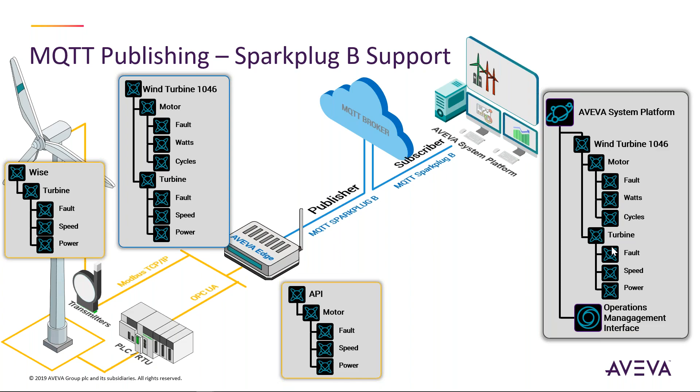Now I'm going to shift gears and start talking about InTouch HMI, which is another one of the components we described as being at that asset location. This was formerly under the Wonderware brand, and it is now completely part of the AVEVA family. When we look at InTouch, one of the most exciting things happening in the 2020 release is in the area of web capabilities.

We've had web capabilities through InTouch with technology called InTouch Access Anywhere for some time, but the key difference here is we no longer have a requirement for remote desktop services. We can now do these things with a very minimal footprint on a client operating system. So you could use a bare Windows 10 industrial PC, and you'll now be able to deliver these as native web capabilities.

It's not going to be an image that's remoted over. It's actually a full HTML5 native system rendering on the far side. That allows you to have a minimal footprint on your server because all of the clients are doing the rendering, so you don't have to do the rendering on the server where it's located. It allows for a very minimal footprint, and it's very exciting stuff.

We've been introducing InTouch web capabilities since our 2017 update 1 release, which was a few years ago. In this particular case, we're really now finishing off that broader story.

I'm going to show you this in a video where we've taken our demo application and reworked it a little bit from a branding perspective, running in a browser. It'll start off running in a Chrome browser, and then that browser will be set to full screen, and it'll look like basically any other InTouch application.

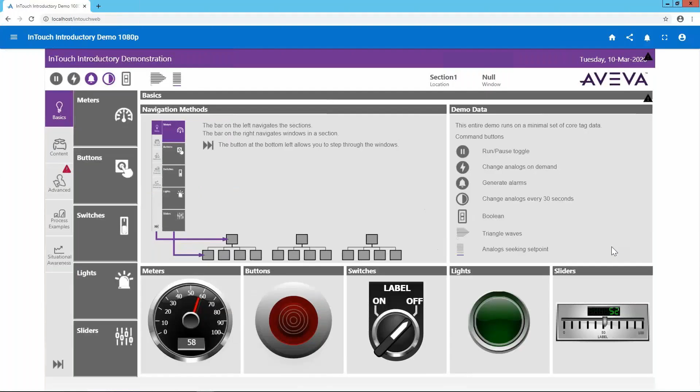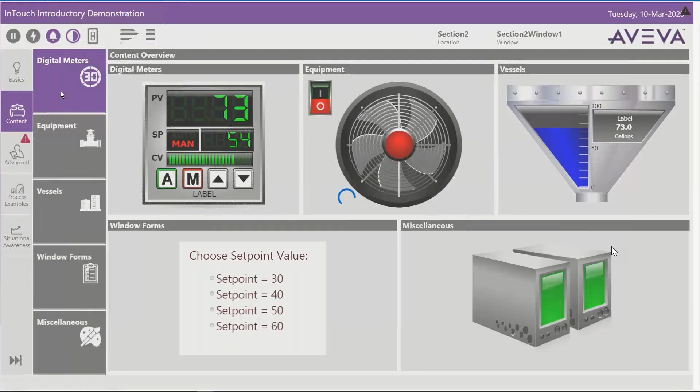Here you'll see I'm running in a Chrome browser. We've just set that browser to be full screen, and now I'm navigating. That's one of the new capabilities, being able to navigate between content. You're also seeing me clicking on some buttons, which allows me to do write back, based on full security, full permissions, and full HTTPS as part of this.

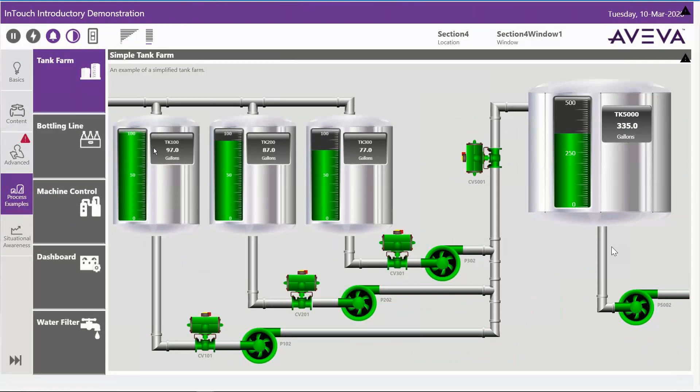We have full capability for things like alarms and alarm controls, being able to do acknowledgements based upon the permissions of the user logged into the system, and access any of your existing content or applications. You can bring those graphics into this system, and leverage even some of the late-breaking capabilities we've introduced with regards to situational awareness and dashboarding capabilities.

We're really excited to put this into the hands of more and more customers so they can start doing some different things. Beyond being able to do basic HMI type capabilities with this web capability, we recognize there are other types of scenarios we can unlock for our customers.

A pretty common use case we see is where our customers are utilizing very low cost TVs that they can put up around their plant, and these TVs often have a browser built into them. How can we use that here?

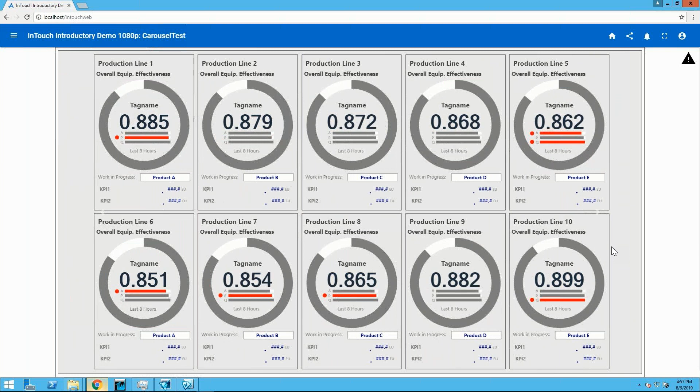Well, we can use that in terms of something we call a carousel. A carousel will take that web browser and push up just a few selected symbols, then carousel through them at a rate you define as part of the web browser widget. So if you have this on a TV, you don't have any dedicated hardware for the TV, and you don't have to have an industrial PC or some other device out there.

If the TV's got a browser built into it, you can just link it up to this particular URL, and it'll go ahead and carousel through so that you can provide that line-level signage onto your applications, all being facilitated from one common source, which is that core InTouch system.

Other use cases we see revolve around mobile. We're introducing two new mobile applications, one for iOS and one for Android, that allow remote InTouch access, so you don't have to figure out the URL or browser to type in your applications. I can store my credentials with this application, select from a list of applications, and bring them up directly to my mobile device. This will facilitate mobile users of all types to have access to their traditional process graphic data inside of InTouch. Very exciting experience you'll see from InTouch there.

With InTouch Unlimited Standard, it gives you unlimited access to web client connections, unlimited access to native mobile connections, unlimited access to RDP connections if you prefer remote desktop protocol, as well as InTouch development. It provides the maximum amount of tags, and while today that remains at 60,000 tags for InTouch, when we increase those in the future, you will automatically gain access to those new amounts of tags as part of that.

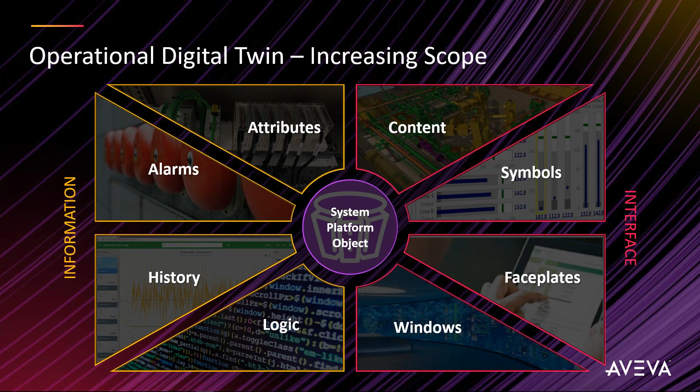Now, when you bring these together, we've introduced new capabilities to make it easier to manage. We've recognized that as these applications grow at scale, it's not uncommon for customers to have applications with hundreds or thousands of objects. Within System Platform, everything is built from standards. We start with a template. Your template has attributes, graphics, scripts, content, and other pieces associated with it. If you make a change to the template, any instances of that template will inherit that change if you've defined it that way. So you can determine which aspects change and which do not.

We're starting to see customers with hundreds of thousands of these objects. With that, we recognized the need to invest in improving the performance of that change propagation. Because it's not just pushing the change down, it's also validating that change, so there's a lot of business logic that has to happen there. We've made a steep investment so we can get those processes happening very rapidly.

It's not uncommon that we have customers with many people working simultaneously on an application. Some customers may have between 10, 20, 30 people working simultaneously, constantly evolving, adapting, and improving them over the course of days, weeks, and months. Making these systems move more quickly and efficiently will absolutely improve their overall productivity. So we're very excited to introduce these new check-in times.

Back in 2017, we introduced something called Operations Management Interface, shortened here to just OMI. It's always been designed with the thought in mind of how do we converge data. I was mentioning earlier about links to external content, and this is how it kind of manifests itself inside of OMI, or Operations Management Interface.

Everything is driven through context associated with an asset. So when that asset links out to content, whether that content be a map, a web page, historical data, or any of the traditional components we've mentioned, they all become part of a data-driven system. Our vision for where this will happen in process visualization going forward is less assembled and more automatically occurring. We expect that in the future, because I know where that data resides, I bring the data forward and use a data-driven model to assemble applications.

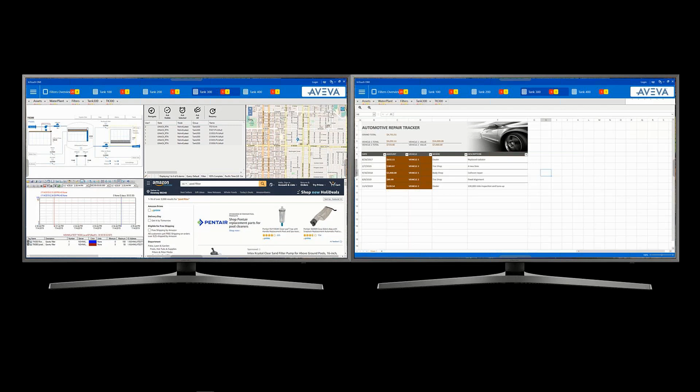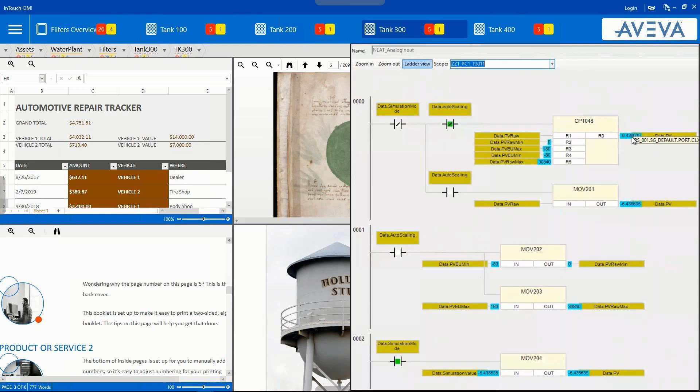And then as I use my applications based on context, context will surface any related information based upon the user interface you've decided it to do, when I select it. You're seeing here a variety of different types of information that has been linked to the asset currently selected. Our tank 300 is selected, and they're showing a variety of asset types of data. Now we're seeing some new ones, even going down and looking at the PLC logic and its current execution. I'll come back to that in a moment.

But the key focus around OMI is to be able to link these things, and these things are linked through what we call apps, or OMI apps in here. We're continuing to expand our extensibility into other types of content.

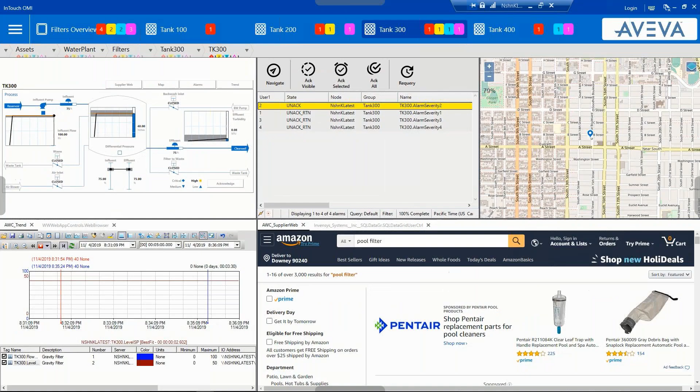A couple things you'll notice here: the grid I'm showing is a standalone grid that can either be in .NET Win Forms or WPF form. On the left-hand side, the thing that just popped up is the InTouch web client, embedded into one of the frames there, and I can go full screen on that as necessary. These are all now just core components. If you want to bring in any piece of third-party content, we have the ability to ingest that and utilize it just as if it were a native app.

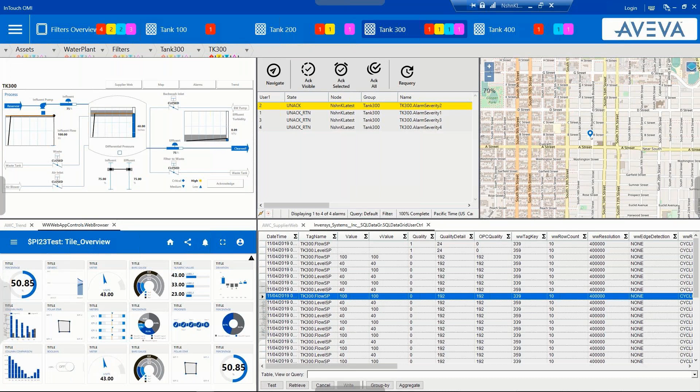But we're continuing to invest in our native apps as well. Here's an example of our native application in an area we're investing: we're finding more and more customers who want to develop a single application and have it become responsive.

What you're seeing is our layout editor. You're actually selecting between different form factors and how you can adjust your content based on that form factor. You're seeing here how the same application, when brought up in different form factors, is actually adjusting itself, all done through that responsive layout editor.

The responsive layout editor focuses on what you see is what you get, sometimes shortened to WYSIWYG, as you see on the screen here. It allows you to design your application for a target device in the way you see fit. It's a very intuitive mechanism, and it delivers you a very easily accepted application across your user base.

So regardless of where they connect, as I showed earlier in that edge to enterprise, you have so many people connecting from a different set of devices. You don't want to force one user interface upon everybody, and you also don't want to redesign your application over and over. This responsive layout editor is a core way of making that possible through a common application that you don't have to rework and redesign consistently.

Looking at some of the new apps we're delivering, this one's actually an update. Our map app is one of our first apps, and it completely embraces this data-driven model, where on the back end all I needed to do is give it a list of assets, tell it where those assets are located, and what types of graphics I'd like for map pins, and it automatically assembles everything for you. It's pretty much magical when you get it going.

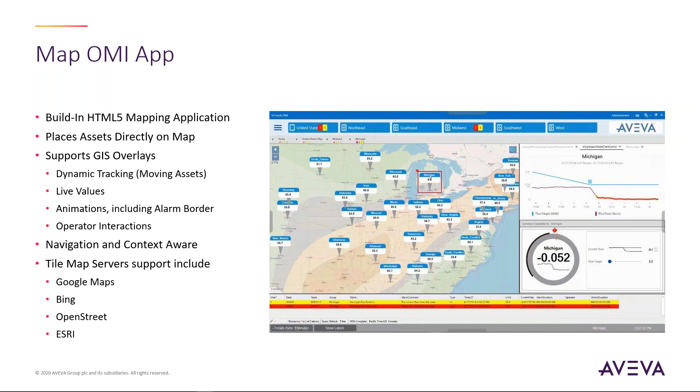We've also updated one of the other apps that's seen a lot of progress, and that's our content presenter. If you've not seen it before, the way it works is you can point it at a point in your navigation model, typically the asset model you create with your objects inside the system. You can point it and it will look across that asset or any above or below it, or you can determine how you want that to behave.

The key thing here is that it all just automatically makes itself happen as this data-driven mechanism that I was describing. You focus within OMI on your navigation model and on your content, and the application itself adapts to that based upon its current context.

Some of the other applications we're introducing here, I'm going to come back to that PLC logic viewer and give you a little bit more detail on what that really entails. PLC Logic Viewer in its initial release will support the Rockwell RSLogix 5000 series controllers. What it in essence allows you to do is, based upon the context that's been set, it will navigate to coils inside of the system.

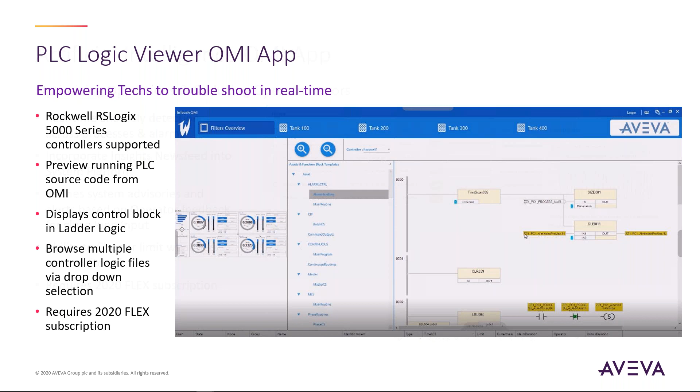Here's another one that's been really generating a lot of enthusiasm across our customer base, and it pairs up with our Insight offer. I'll talk more about Insight later, but here's a quick preview. Insight has a capability of doing something we refer to as unsupervised learning. As you feed Insight data, it will automatically try to find information about that data.

A simple case is like a news feed, a news story that it can provide to viewers saying, hey look, this particular value has never been this high. That doesn't mean it's an alarm. It's just going to say this is the highest this value has ever been, or the highest it's been in a particular period. It can say it's the lowest, or it's changing quicker than it's ever changed before.

You can identify things that are multivariate as well. It'll say, okay, I know these things are in associated areas and they tend to move together. For example, if this valve position and this level in this vessel tend to move together, when the valve is closed, the level tends to be still, meaning it's not draining. But what happens when the valve is closed and now the level is moving? Well, that might indicate a leak. You don't have to program it in to go find leaks. It says, well, normally it doesn't do that, and it can surface this information for you automatically.

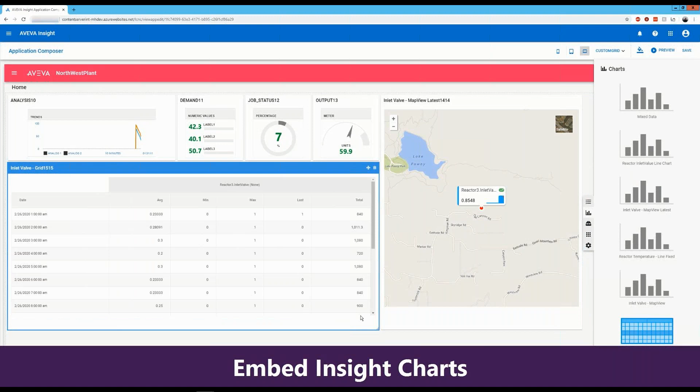And in this case, you're seeing it from end to end, where you're seeing exactly how much it takes to build one. So you build a model, you link things to the model, and then ultimately we're going to show it going to runtime. But this is a very easy to use system that allows you to take all those pieces and parts and assemble them into an application. You can use our content or you can use external content as well.

This is going to be a very exciting space because we see now that customers can build their own applications that they don't have to host on their hardware, but they can just put them into the cloud and have ubiquitous access without having to worry about setting up VPNs and other types of network capability, but still focusing also on connecting into their secured Active Directory systems. So very exciting things that are happening inside of Insight.

Now, we don't expect that everybody has to use everything. The parts that are important to you are the things that you use, and you pick and choose those things. So I could use Edge directly with Connect, or I could use InTouch directly with System Platform, or I could use IoT View directly with System Platform. I don't need to have every piece and component here. I use those things that are right for my business, the things that are right for my operation, and we're staying focused on ensuring that we drive that innovation.